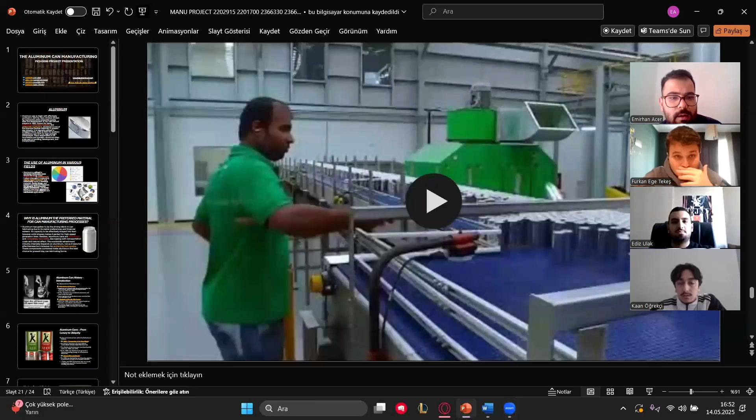Hello everyone. Today we are going to present you the aluminum can manufacturing. My name is Emirhan Acer and also my friends are Ediz Ulak, Furkan Ege Tekeş and Kaan Öğrekçi.

We start with what is aluminum? Aluminum was first effectively isolated in 1825 by Hans Christian Ørsted. Its industrial utility expanded quickly after the development of the Hall-Héroult process in 1886. Known for being lightweight, corrosion resistant, and highly conductive, aluminum is one of the most versatile materials in present day industry.

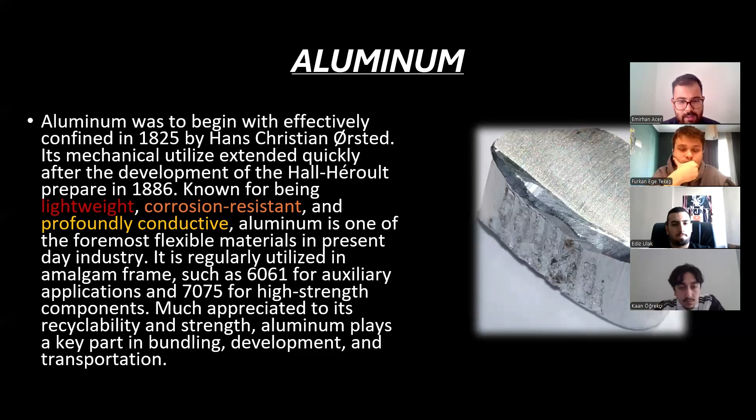It is regularly utilized in alloy form, such as 6061 for structural applications and 7075 for higher strength components. Thanks to its recyclability and strength, aluminum plays a key part in packaging, construction, and transportation.

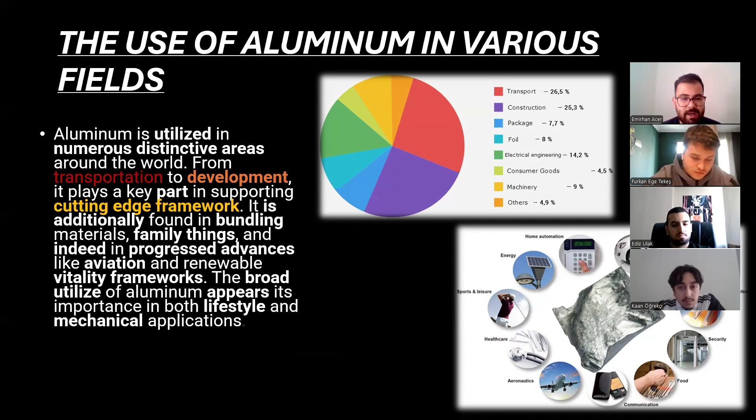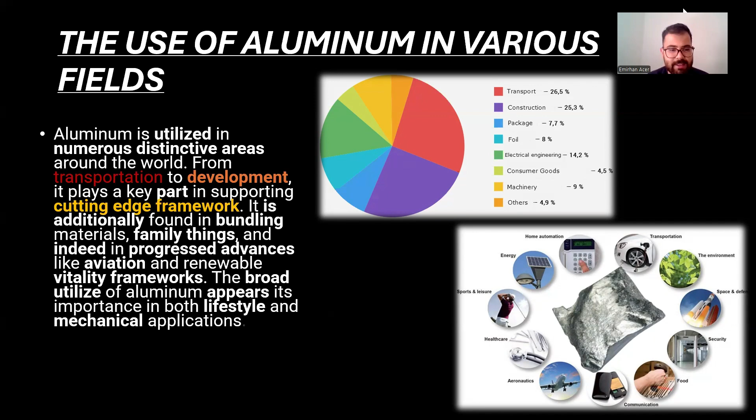The use of aluminum in various fields. Aluminum is utilized in numerous distinctive areas around the world, from transportation to construction. It plays a key part in supporting modern infrastructure. It's in packaging materials, familiar things, and even advanced technologies, like aviation and renewable energy systems. The broad utility of aluminum shows its importance in both daily life and industrial applications.

Why is aluminum the preferred material for can manufacturing process? Aluminum has become leading for manufacturing due to its practical advantages and economic value. Its capacity to be easily shaped into thin, yet solid shapes makes it perfect for high-speed production lines. Besides, aluminum cans are lightweight and completely recyclable, decreasing both transportation cost and environmental impact.

The worldwide beverage industry heavily depends on aluminum, not only for its efficiency, but also for protecting its product quality. These components combined make aluminum the best choice for present-day can manufacturing processes.

Aluminum can history. Introduction. The evolution of aluminum cans, early history of aluminum. Aluminum was first isolated in the 19th century, with its commercial production beginning in the 1850s. At first, aluminum was considered rare and more expensive than gold. Early uses of aluminum were restricted due to its cost.

Aluminum in the 20th century. In the 1960s, aluminum cans started to gain popularity, especially for beverages. The first aluminum beverage can was introduced in 1963, marking the beginning of mass production.

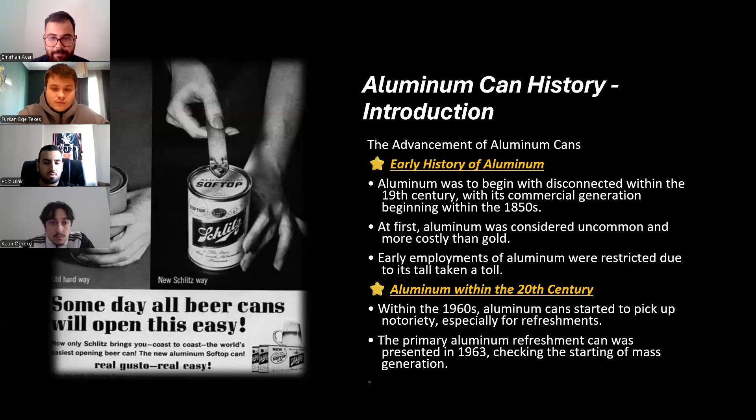Aluminum cans from luxury to ubiquity. In the 1960s, with the introduction to a mass market, the first aluminum cans were used mainly for soft drinks like Coca-Cola. The popularity of aluminum cans grew quickly in the 1960s and 1970s. By the 1980s, the aluminum can became a standard packaging method for beverages globally.

Environmental impact and recycling. The 1980s marked the rise of recycling activities as aluminum cans became widely recyclable. Today, over 90% of aluminum cans are recycled, making them one of the most sustainable packaging options.

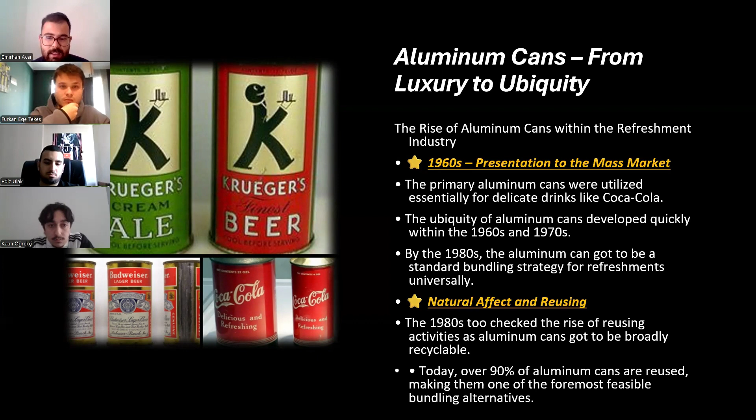Hello, my name is Kaan.

Modern day, a global standard. The worldwide impact of aluminum cans. Worldwide usage: each year over 100 billion aluminum cans are produced globally, with billions of cans distributed each week. Nowadays, aluminum cans are not just packaging material, but a symbol of convenience, sustainability, and innovation.

From luxury to everyday use, what was once a rare expensive metal is now used in millions of cans around the world. Aluminum cans continue to be a revolutionary product in the food and beverage packaging industry, changing how drinks are stored, transported, and distributed.

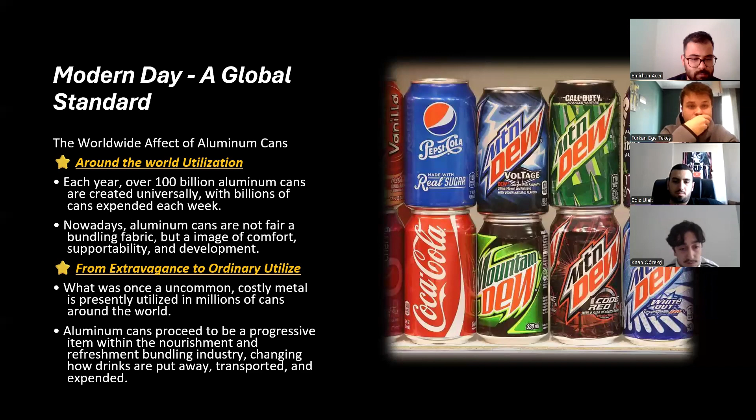Introduction to can manufacturing process. Aluminum cans are a key component of contemporary packaging, which is characterized by recyclability, lightness, and strength. The presentation discussed the step-by-step manufacturing process from raw material to end product, encompassing the technological and environmental dimensions.

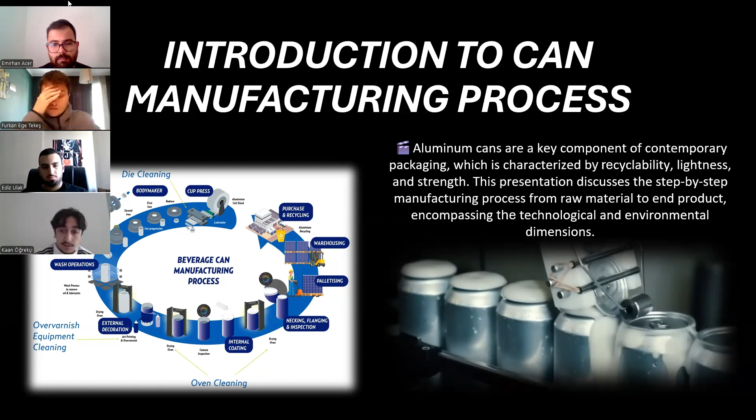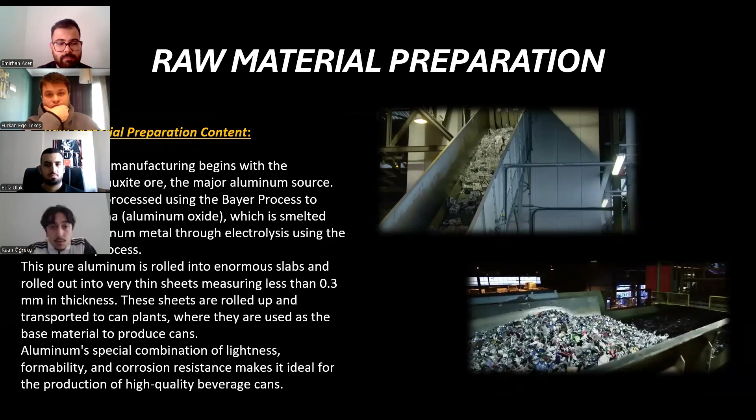Cup blanking, raw material preparation. Aluminum can manufacturing begins with the extraction of bauxite ore, the major aluminum source. The bauxite is processed using the Bayer process to produce alumina, aluminum oxide, which is smelted into pure aluminum metal through electrolysis using the Hall-Héroult process.

This pure aluminum is rolled into enormous slabs and rolled out into very thin sheets measuring less than 0.3 millimeter in thickness. These sheets are rolled up and transported to can plants where they are used as the base material to produce cans. Aluminum's special combination of lightness, formability, and corrosion resistance makes it ideal for the production of high quality beverage cans.

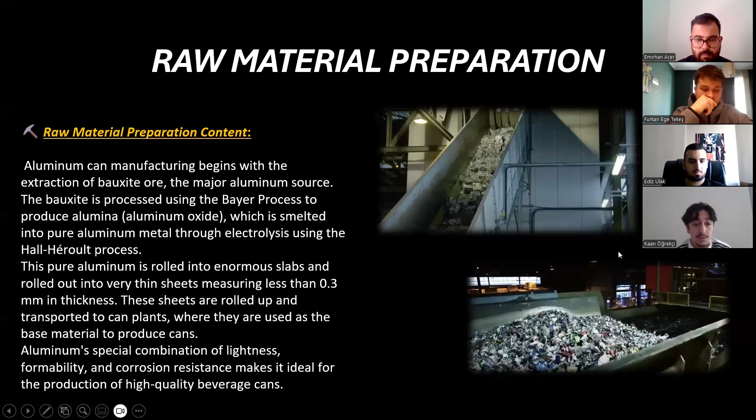Cup blanking and drawing. In this stage, aluminum sheets are fed into a high-speed press machine. First, circular blanks are punched out of the sheet. This is known as cup blanking. These circles are then pushed into a die using a punch, forming them into shallow cups in a process called drawing.

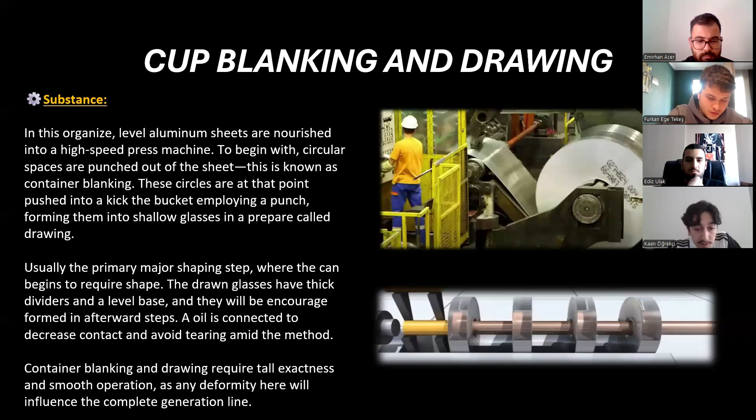This is the first major shaping step, where the can begins to take shape. The drawn cups have thick walls and a flat base, and they will be further formed in later steps. A lubricant is applied to reduce friction and avoid tearing during the process. Cup blanking and drawing require high precision and smooth operation, as any defect here will affect the complete production line.

Ironing and doming. After drawing, the thin aluminum cups pass through a series of ironing rings. Lengthening and thinning of walls occur to bring it to the full height while maintaining constant diameter. Base thickness is not changed, for durability. At last, the bottom of the can is domed. A concavity is formed so the can's strength and resistance to pressure on the inside from carbonated beverages are enhanced.

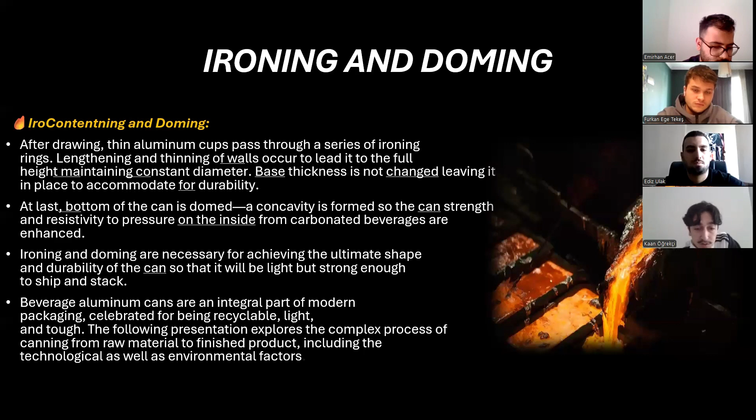Ironing and doming are necessary for achieving the ultimate shape and durability of the can so that it will be light but strong enough to ship and stack. Beverage aluminum cans are an integral part of modern packaging, celebrated for being recyclable, light, and tough. The following presentation explores the complex process of canning from raw material to finished product, including the technologies as well as environmental factors.

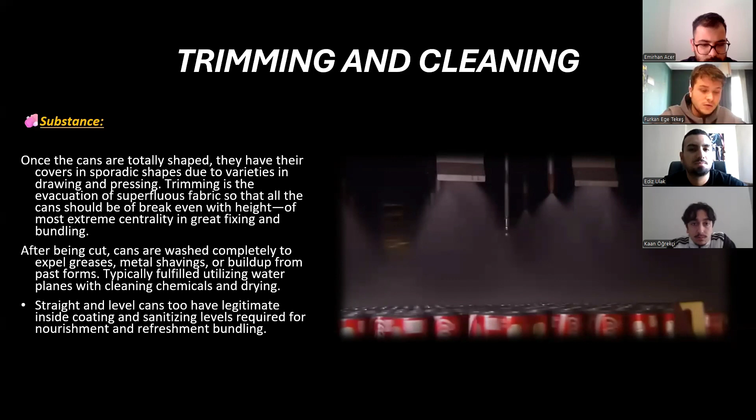Internal coating. After washing, all the cans receive an internal coating. A light coating of lacquer is sprayed on the inside walls and base. This is to prevent corrosion and to keep the beverage from coming into contact with the aluminum. The coated cans are subsequently passed through an oven to cure the lining, allowing for good adhesion and long-term strength. This process is required to maintain taste integrity, safety, and extend the shelf life of the drink.

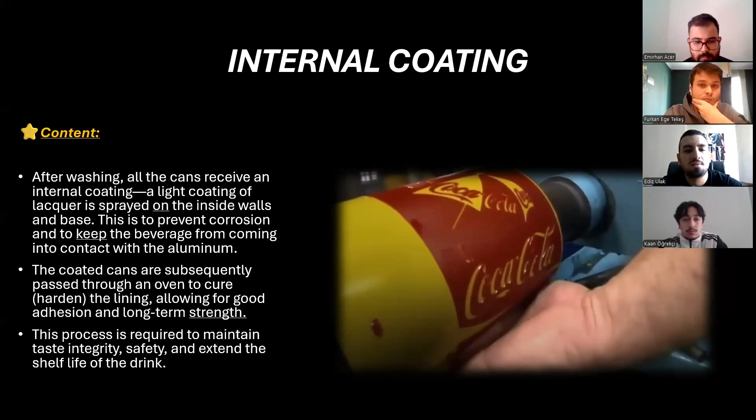External printing and varnishing. Once the inner coating is cured, the cans move on to the outside printing stage. Here, high-speed printers apply colorful designs, brand logos, and product information onto the can surface using exact registration for perfect alignment. After printing, protective varnish is applied over the design. This layer enhances the visual appearance and gives scratch resistance during transport and handling. This stage changes the can from a raw container into a recognizable branded product, ready for the consumer market.

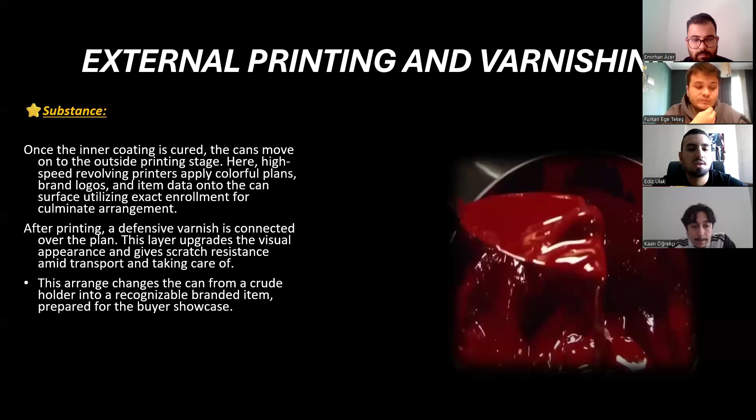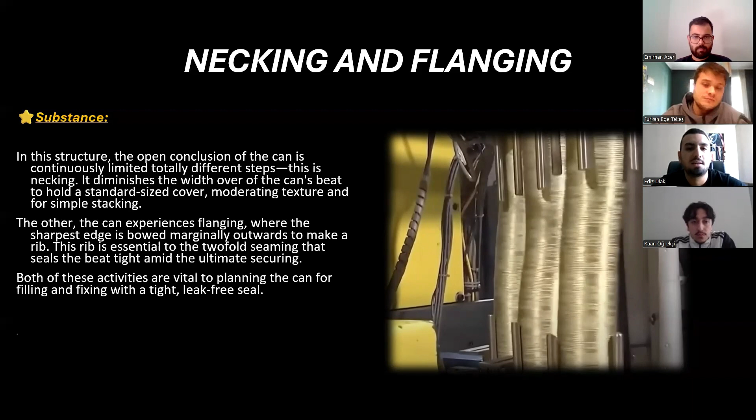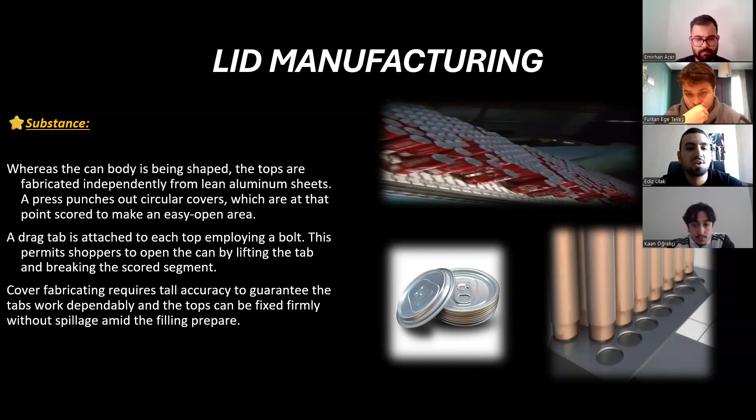Lid manufacturing. While the can body is being shaped, the lids are fabricated separately from thin aluminum sheets. A press punches out circular lids, which are then scored to make an easy-open area. The pull tab is attached to each lid using a rivet. This allows consumers to open the can by lifting the tab and breaking the scored section. Lid manufacturing requires high accuracy to ensure that tabs work reliably and the lids can be sealed firmly without leakage during the filling process.

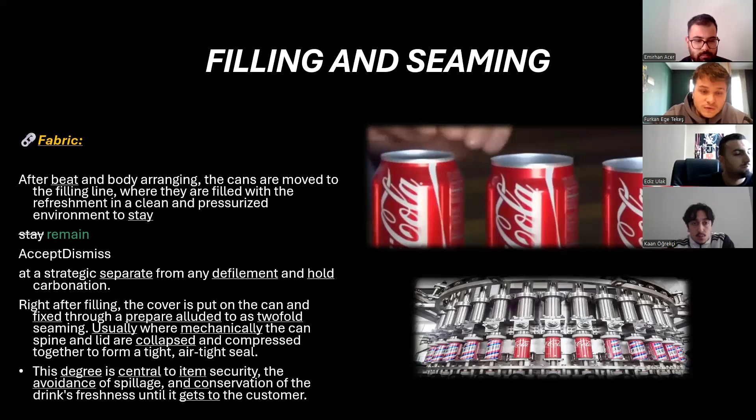Next, we will focus on filling and seaming. After lid and body forming, the cans are moved to the filling line, where they are filled with the beverage in a clean and pressurized environment to avoid any contamination and retain carbonation. Right after filling, the lid is put on the can and sealed through a process referred to as double seaming, where mechanically the can rim and lid are folded and compressed together to form a tight, airtight seal. This step is central to product safety, the prevention of leakage and preservation of the drink's freshness until it gets to the customer.

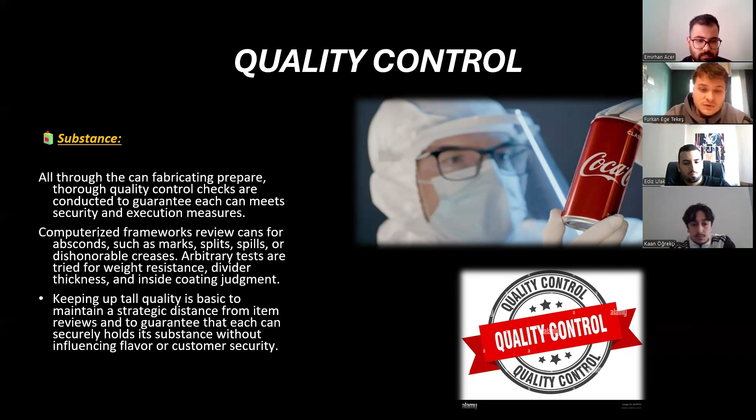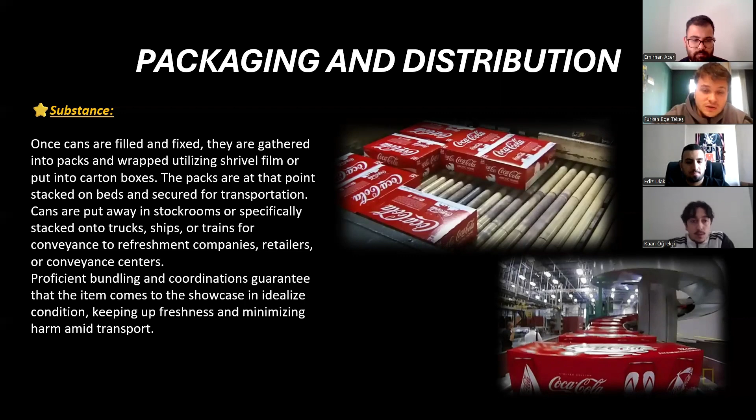Up next is packaging and distribution. Once cans are filled and sealed, they are grouped into packs and wrapped using shrink film or put into cardboard boxes. The packs are then stacked on pallets and secured for transportation. Cans are stored in warehouses or directly loaded onto trucks, ships, or trains for delivery to beverage companies, retailers, or distribution centers. Efficient packaging and logistics ensure that the product reaches the market in perfect condition, maintaining freshness and minimizing damage during transport.

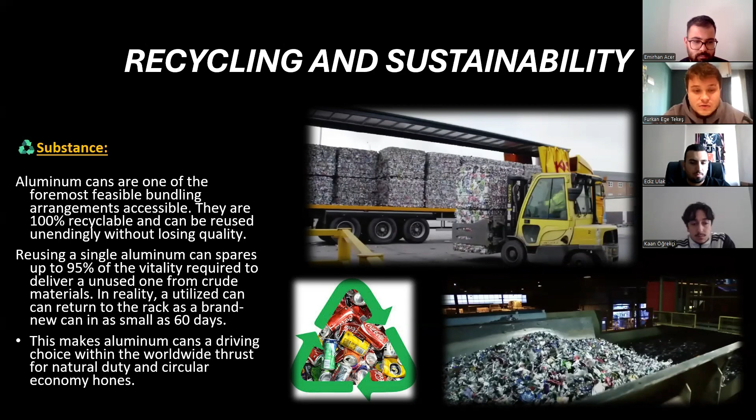Recycling and sustainability. Aluminum cans are one of the most sustainable packaging solutions available. They are 100% recyclable and can be recycled endlessly without losing quality. Recycling a single aluminum can saves up to 95% of the energy required to produce a new one from raw materials. In fact, a used can can return to the shelf as a brand new can in as little as 60 days. This makes aluminum cans a leading choice in the global drive for environmental responsibility and circular economy. Here is the video about these topics.

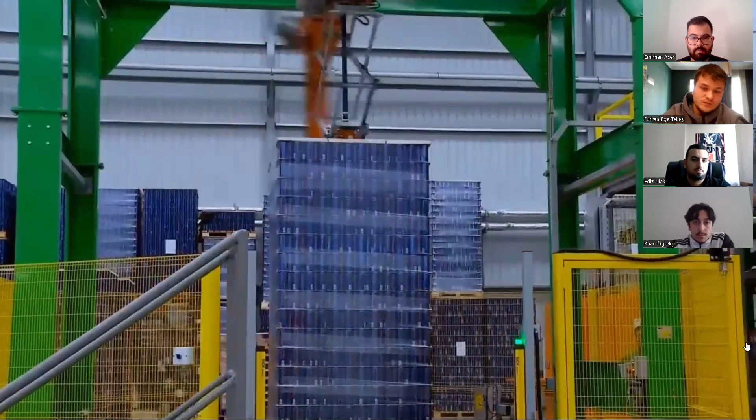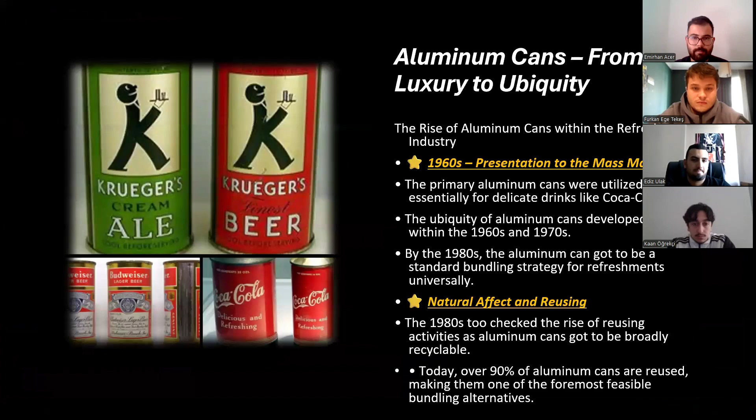And the last part is the conclusion. The aluminum can is a remarkable example of modern manufacturing, combining engineering precision, speed, sustainability, and functionality. From raw bauxite to finished recyclable beverage container, each step is optimized for efficiency, safety, and quality. Its lightweight nature, recyclability, and protective design make it not only consumer friendly, but also eco-conscious. The journey of a can shows how industry and environmental responsibility can work hand in hand. Aluminum cans do not just hold beverages. They hold a long-standing time of smart design.